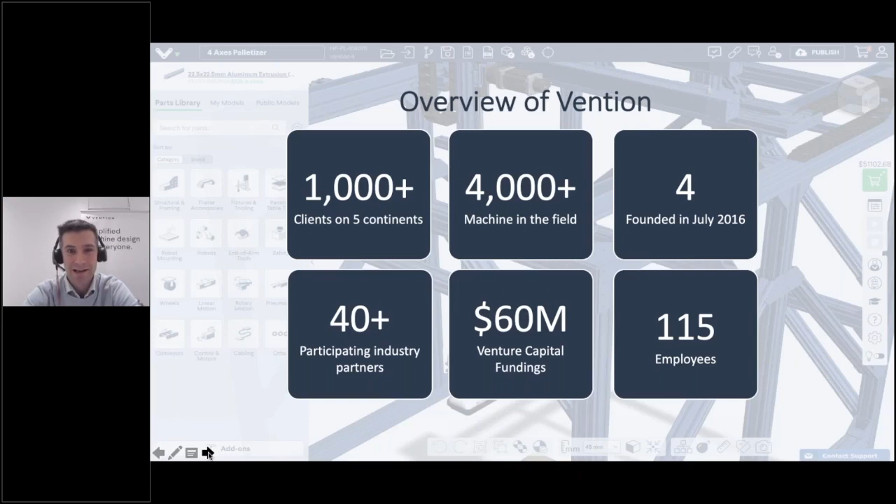Now, I'll start today's discussion by talking about what is changing in the world of industrial automation. All of you here today must have seen or experienced firsthand the world of industrial automation as we know it. We've seen car factories and consumer electronics factories being fully automated for several decades now, and that's a true reality. But if you look at the broader range of manufacturers out there, there is a significant amount that today cannot automate.

The reason for that is fairly simple: the price point of acquiring and deploying more traditional industrial automation technology is such that unless you're a high throughput factory, it's really hard to generate an interesting payback. The higher mix you are, the shorter the payback period you will expect. Most of the clients we work with would like to achieve below a 1 year payback.

By running hundreds and hundreds of business cases and ROI simulations with our clients, we tend to see this break point around 20,000 units a year, where below that, with traditional industrial automation technology, it's really hard to achieve that given payback for higher mix manufacturers.

There's a reason why industrial automation technologies are costly. First of all, the price point of the technology has been geared for high throughput production, but also just the sheer cost of integrating technologies from various manufacturers into a comprehensive system is quite manual and requires very expert professionals to support such tasks.

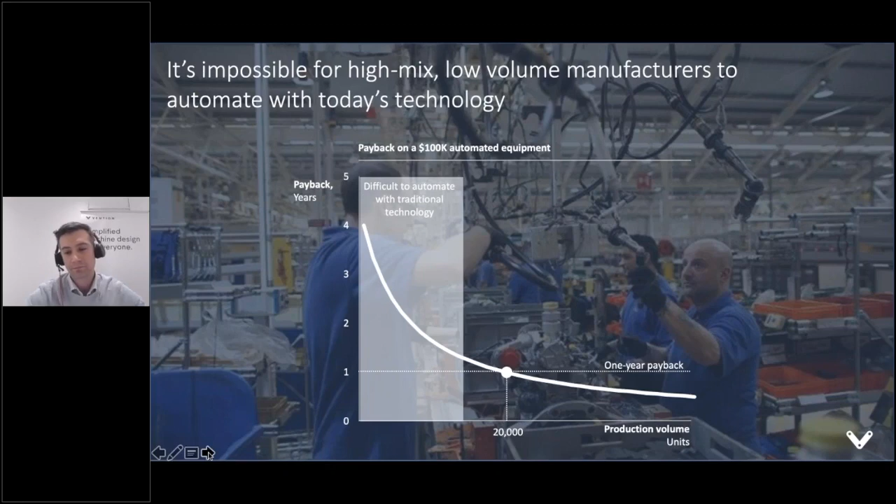Interestingly, I started my career in the world of machine design. I was a very young engineer sitting behind a CATIA station back in the early 2000s, and this is the process that I used to go through several times a year as I was supporting machine design for some of my clients back then. We were starting most projects, once the spec was fully established, by going on various industrial distributor websites to find all the components and technology we might need.

And all those components, even though of extremely high quality and very well suited, were all operating across different standards.

So you were finding those components, finding the 3D model, bringing that into your 3D CAD software, and realizing that a lot of those components use different standards, whether connectivity, protocol communication, or just mechanical standards. So you realize you have to design several custom parts to unite those components as one. And from those custom parts, you have to issue 2D drawings, generate a bill of materials that you can eventually give to procurement to start sourcing the hundreds of components that a custom automated equipment might require. It's only after all the vendors are found, typically folks that meet both quality and cost.

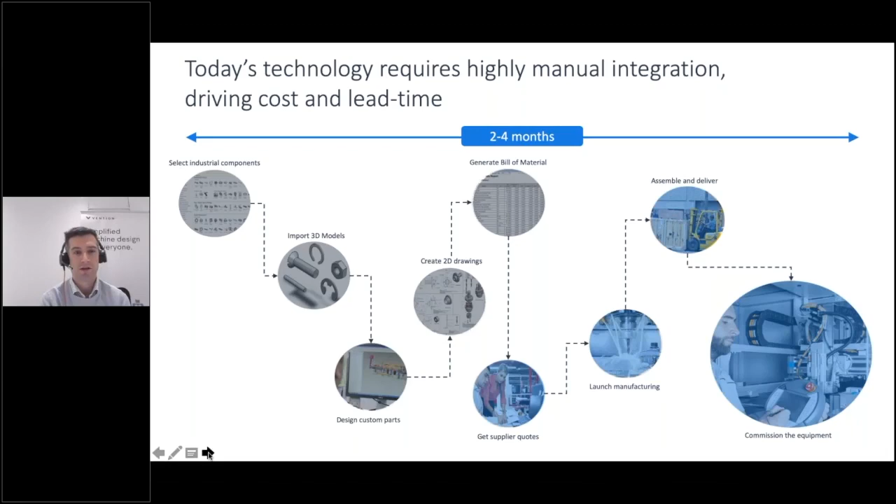So what happened for us around 2014 is we realized there's a humongous cost saving and time saving opportunity by removing those interfaces. But if we were able to provide a digital environment where users can select, design, automate, purchase, and deploy their equipment in the comfort of a web browser, you would save a lot of time and therefore money. And as a result, drive down significantly the cost required to deploy industrial automation, expanding the market from where it is today.

Those are some of the initial trends that we had seen in the early days of Vention, but there's a couple I want to point out because those trends are not going away, and I would even imagine that the world we're in with the pandemic would actually accelerate some of those trends that were there back in 2016.

One thing for certain, when I was back in the early 2000s designing custom industrial equipment for automotive and electronic clients, the platform of those products used to last between, a car could last for probably 7 years. Today it's now 3.5. Consumer electronic products could last for 2.5, 3 years. Today we see some of our clients operating on a 12-month basis for their consumer electronics products.

So when the time window you have to design and deploy equipment is getting shorter, the amount that you can spend up front is also getting much shorter because you then have less time to depreciate that equipment. Out of a 12-month life product, if we can deploy the manufacturing system in 2 weeks instead of 3 months, we just gave the client back 25% of his product revenue payback, and that's substantial.

To me, this shift in shorter product lifecycle really is opening a new era for industrial automation where the technology has to be right-sized to the product lifecycle. That's one of those trends that isn't going away.

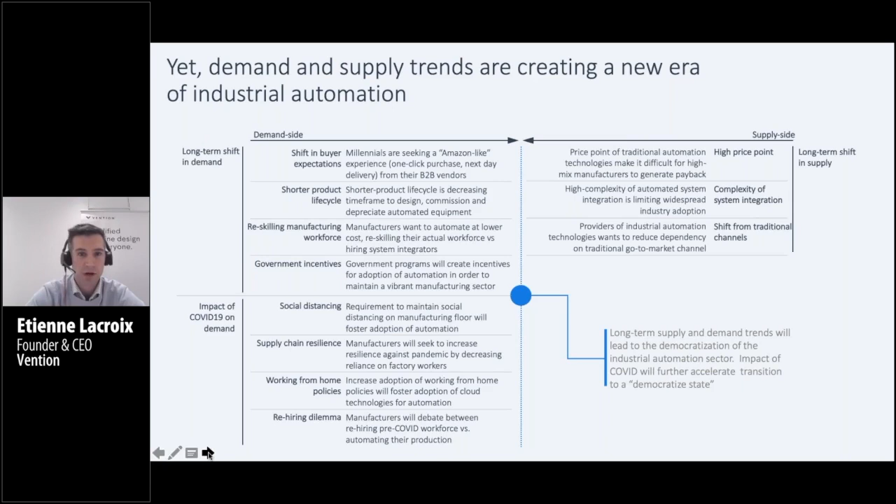Some of the factories that right-sized their workforce during the pandemic will face the dilemma of either rehiring their workforce to pre-pandemic levels or automating some of their previous operations. We tend to see that the decision taken by those companies is a mix or hybrid approach. Obviously, workforce will be rehired, but also more processes will be automated. We expect this to drive greater adoption of industrial automation in the coming years.

Now, what we also see on the supply side is how the market is getting democratized. We see hardware technology providers, folks that manufacture cobots, vision systems, end-of-arm tooling, that today depend on a much more complex go-to-market model with several handshakes required between integrators, distributors, and end users, wanting to have a much more direct approach to end users. The need to deploy their product in a simplistic fashion, where the end user can directly understand and deploy them, is leading to a lot of technologies that democratize our industry.

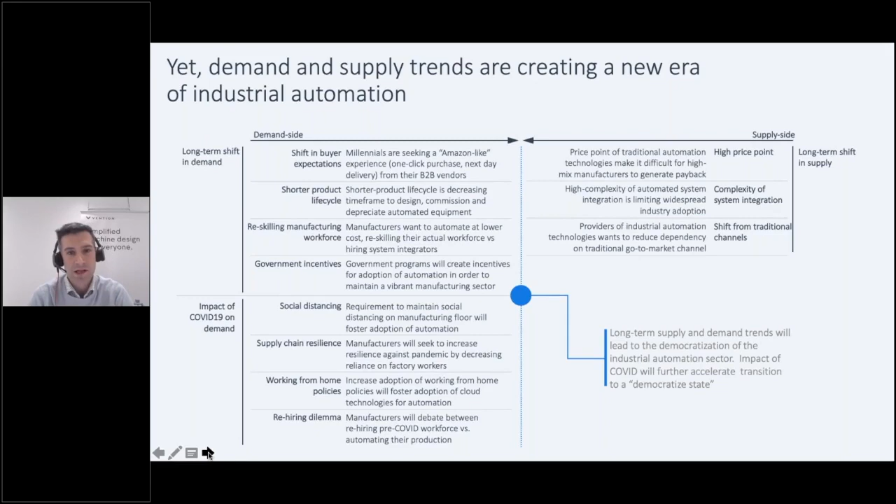A lot of those trends, and there's more I could have covered, are not going away. They're reshaping the demand, reshaping who's the final customer, and reshaping what type of factory is now embarking on industrial automation projects. For us, this change in user, we call that almost a new era for industrial automation. For us, it was the calling for a new category of software.

We call it MAP, or Manufacturing Automation Platform. It's a category of software. Vention is one of them. I think there are others emerging as we speak, but it's a category of software whose primary mission is to empower a manufacturing professional to self-deploy industrial automation technology.

In the world of automation, the beautiful thing is there's now enough modular components that the need to design custom parts is significantly reduced. Once this is true, you can imagine a platform whose primary goal is to make sure that the system being designed or assembled out of those modular parts, those Lego parts, will function through the software itself. Interestingly, you can now envision a world where a lot of those tasks of validating system functionality can be done by software and a curated component list, as opposed to being done by specialized engineers in controls and so on.

And with that, you obviously significantly reduce the barriers for adoption. So for us, this new category of software is called MAP, Manufacturing Automation Platform. It brings aspects of 3D CAD software, PLC programming, PLM software, and definition requirement management software, and it brings them into a single digital environment united from beginning to end.

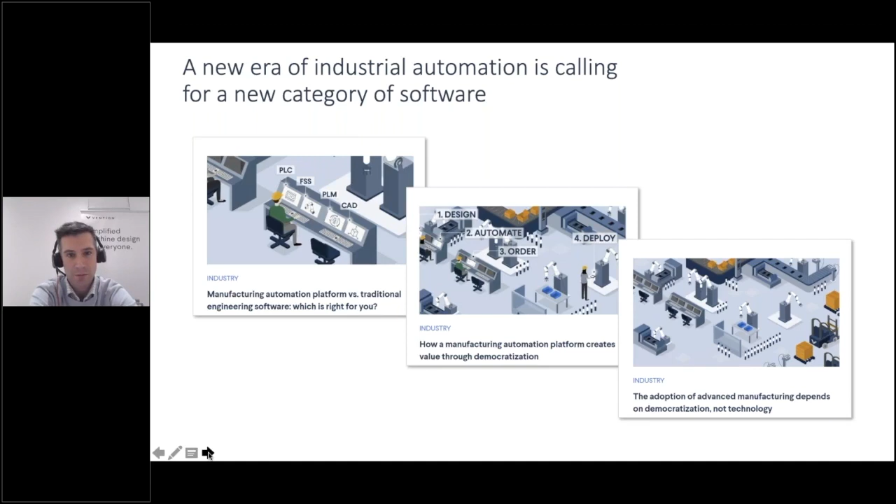Simplicity is significantly augmented by the fact that all the components available within the MAP are compatible with one another. So if a system is designed with those components, the end user knows from the get-go that the system will work. The MAP for us was the missing layer.

We see this as the beginning of the plug-and-play automation era, and I think companies like Universal Robots and ATS have demonstrated that you can already modularize a lot of the building blocks to deploy industrial automation. There's also this need for reskilling and upskilling the workforce, and providing them an environment where they can become successful at designing and creating those systems.

So again, the workforce that used to operate the factory today becomes one that now designs the factory of the future. But to enable all those modular components and this new workforce to design the factory to come together, we were missing that software, that manufacturing automation layer, that MAP, where it brings it all together in the same environment. So for us, MAP has four phases.

A design phase that is mostly, entirely online, where users can work out of modular parts coming from all sorts of partners that specialize in robot arms, end-of-arm tooling, conveyance technology, and vision systems, and they're integrated in a way that if they're available, they're compatible with one another. So they are integrated in a very curated fashion, and end users can design because a lot of the 3D design software simplifies the design experience.

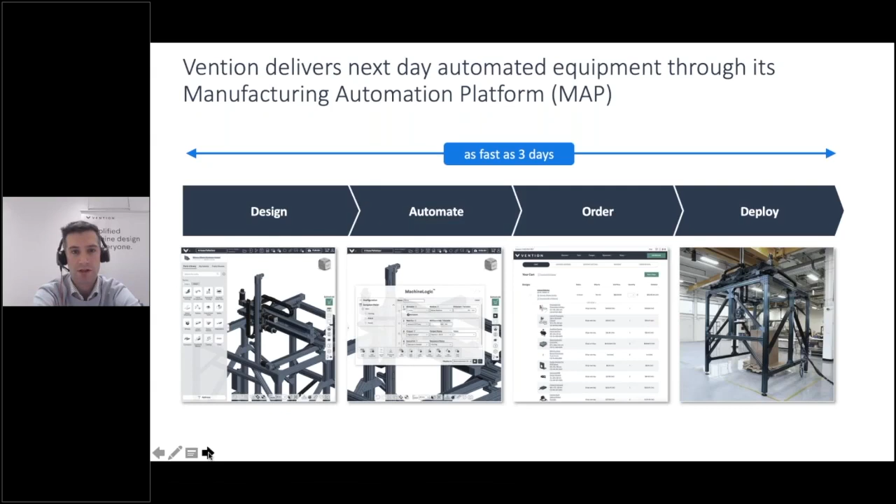To show you that all in action, I'll ask Anna to display a little short video that will last roughly 30 seconds.

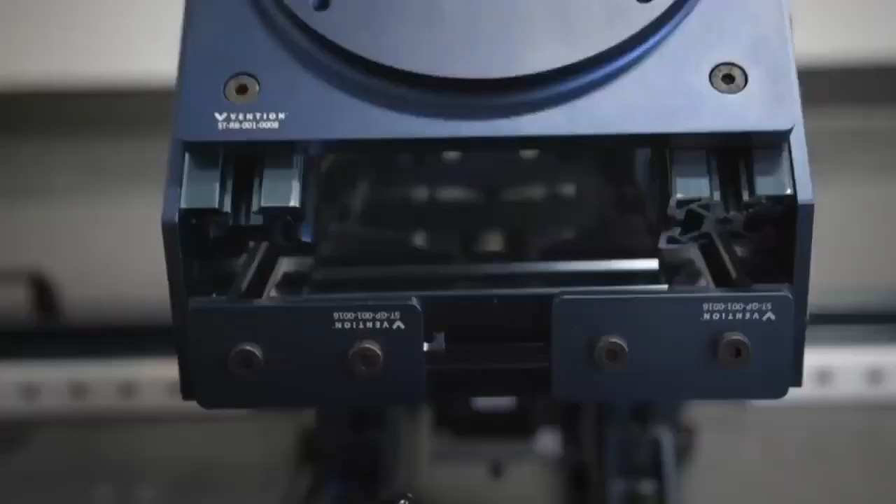Build custom industrial machines in days. Design your machine in the simplest online CAD. Get inspired by our public designs, or build your own in minutes. Program and simulate your machine directly in your browser.

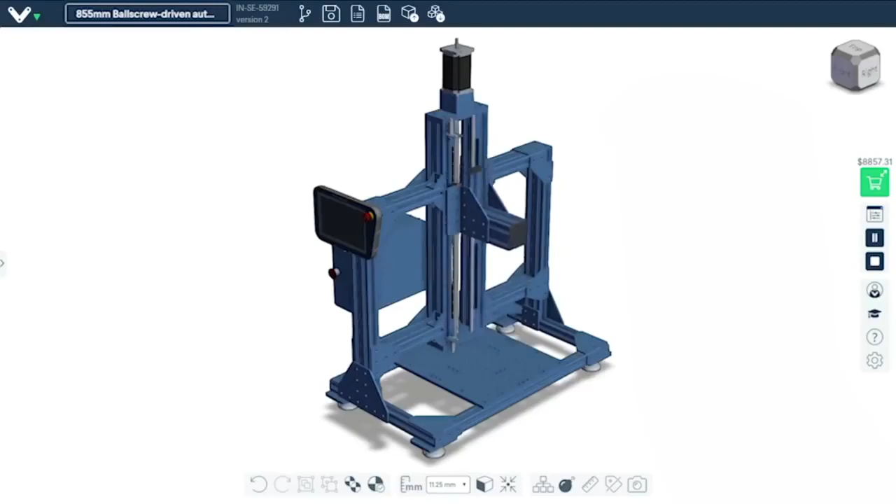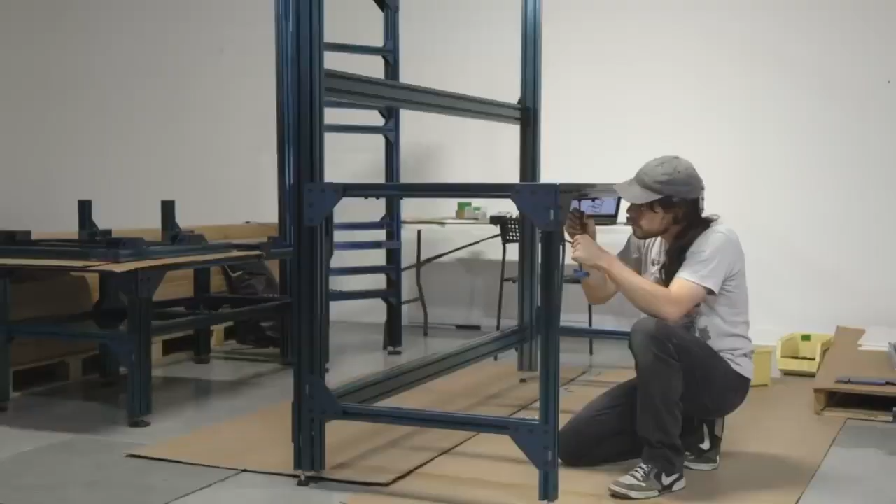Build a broad range of automated equipment, no matter the complexity. Upon completing your design, review your bill of materials, select shipping options, and order. Receive your part kit within days. Assemble your machine using a single tool from beginning to end. Simple, quick, and efficient. Design your machine today. Receive it tomorrow.

That gives you a sense of what is possible today with today's technology in terms of simplifying the act of designing automated equipment. I'm just trying to change a slide as we speak. There we go.

If we put those time savings together, to go from the traditional two-month process and bring that down to a few days, we had a chance to work with clients that compared the cost of their more traditional approach with the cost of an integrated approach for their specific project.

And what we typically see is that a lot of the cost savings materialize as part of the engineering work. Less time designing 3D equipment - this is typically reduced from weeks to just a couple of hours. Obviously, no need to create 2D drawings when you work out of modular parts only. No need to pay for a CAD license. Significantly faster procurement cycle, as information doesn't need to be converted from one system to the next. Everybody has access to the online design and can proceed with purchasing, given their proper rights. Significant time reduced as well in validating component compatibility and figuring out how to integrate them during the deployment cycle.

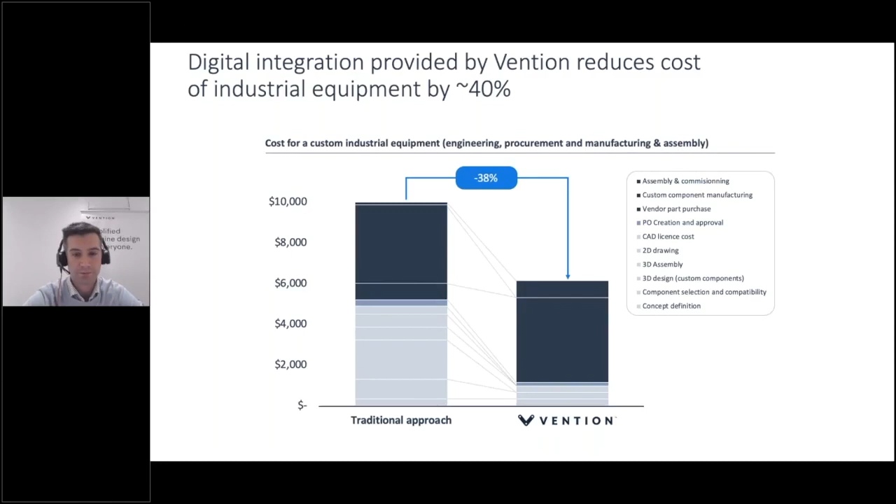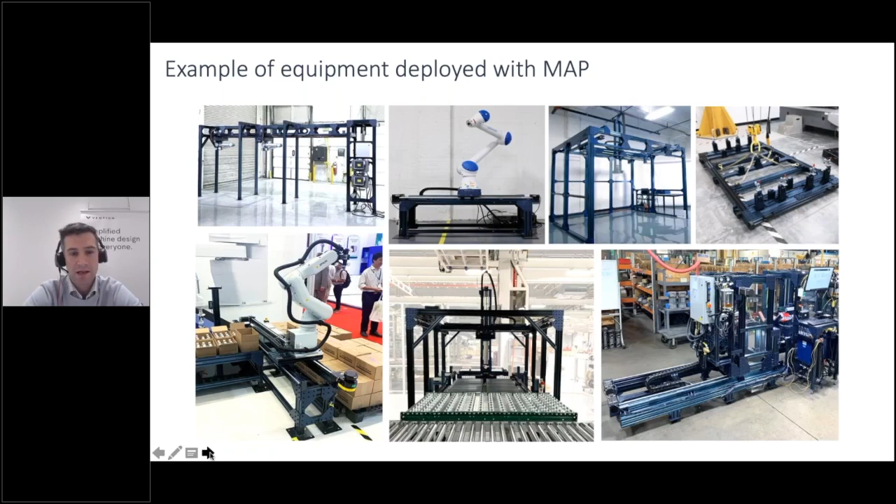So the range of complexity varies greatly, from more simplistic automated equipment to more complex automated equipment. But again, they've all been through a very similar process, where the starting point was an online design, followed by an online purchase and self-commissioning afterward.

So now I'm going to go over some of the technology building blocks behind MAP in the next 5 minutes. So if I go back to this MAP workflow - design, automate, order, and deploy - I think there are several components of technology that are required to make this workflow work as one and provide the time savings we've defined.

One of them for us is the ability to define requirements online. Very often with this new class of user that is just beginning their learning and understanding of the industrial automation world, we need to give them tools so they can express what they need in a way that will lead to success. We'll call that machine scope in our case - it's basically a requirement definition where folks can define their current process, define the new process, scope how they're going to validate that the new machine will work, and obviously define their holistic set of requirements.

3D design online that is very simplistic, for us we call that machine builder. If I move to the automate phase, MachineLogic is a code-free way to program and simulate automated equipment. Machine motion is a control technology, and Simon touched a little bit on the control cabinet. Machine motion is a way for us to prevent users from having to create a custom control cabinet, but instead use a box that is already equipped with all the requirements, the safety system, the drive, power supply, control infrastructure, and can be rapidly deployed without having to create a custom cabinet.

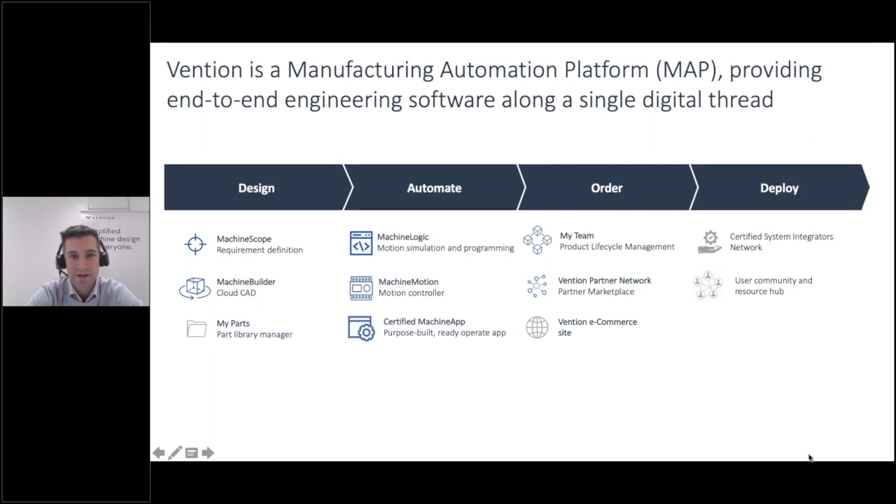My Team is the portal where teams can collaborate. One thing that every company and every user has in common is a web browser, and My Team is a way to bring everybody together.

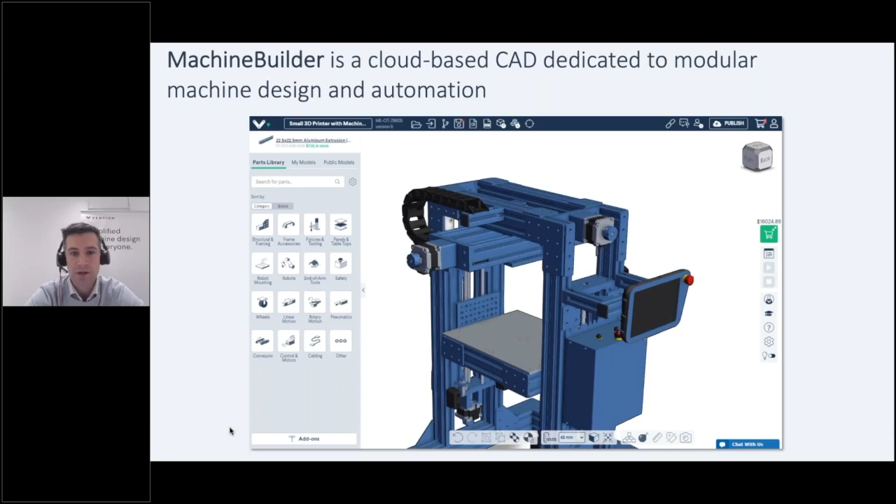This is an example of machine builder. On the left side, you see this modular part library that users can pick and choose from. All those parts are compatible with one another. On the top right, you actually see price in real time as components are added or removed. You can even see the commissioning time you'll need to assemble that machine based on the parts selected.

In terms of simplifying 3D design, which is really the starting point of every single automated equipment, the ability to work with modular parts, or those Lego parts, enables us to do design automation tasks that would not be possible in a traditional CAD. So I'm just going to point to a few of them.

One of them is what we call the configurator, or component configuration engine. If somebody picks a linear actuator, the tool will drive the user through a step-by-step guide to configure that component properly. Similarly, a part kit assistant is a feature where, if you want to use a light curtain for example, which comes in pairs, there's a left side and a right side, it will guide the users through selecting all the proper components that are individual parts of a given kit.

Design checker, this is one of my personal favorites. Design checker is a procedural engine to make sure that the design will work in reality, that all the laws of physics will be respected. To some extent, design checker is a spell check for machine design. As we build more and more automation, that type of technology becomes more and more sophisticated.

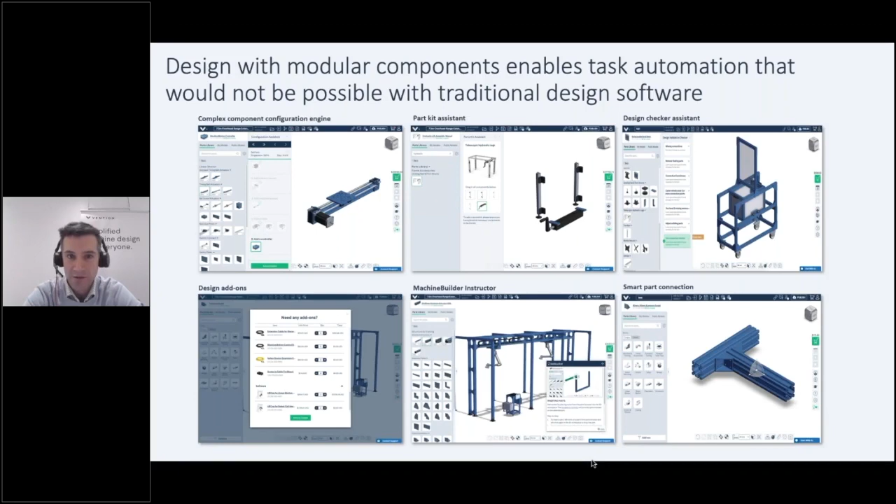There's also an instructor feature in the middle bottom, which is an interesting one, where users can learn how to design industrial automation equipment with a step-by-step guide as they actually design their intended equipment, which makes the act of learning very easy and accessible to a broad class of users.

Machine logic, again, is this code-free environment that replaces the more traditional PLC programming interface, where users can still create fairly complex programs with loops, variables, and conditional logic, and create applications that are hardware agnostic—whether it's a timing belt or a ball screw actuator, the software remains valid and agnostic of the hardware choice being taken.

That software takes the user from the cloud to the shop floor in just a few clicks. Once the equipment is deployed, it's the actual same user interface that can be retrieved to operate the machine on the floor.

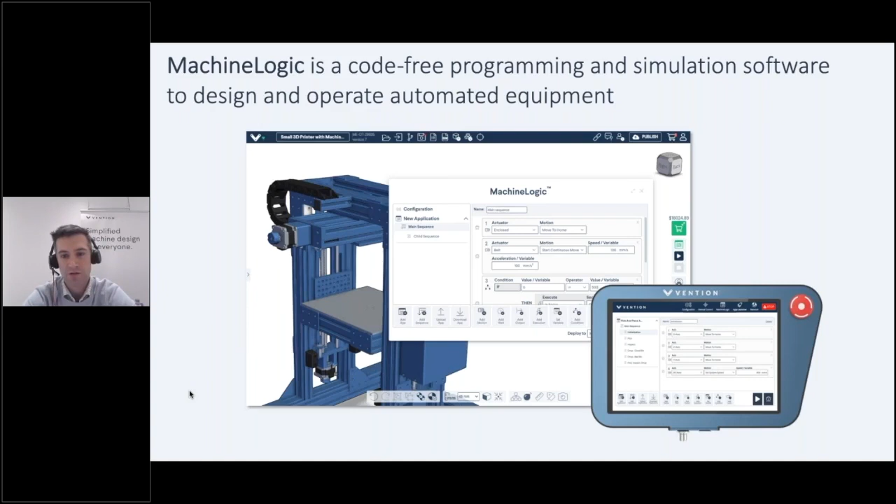For us, at the heart of such simplified industrial automation infrastructure is something we call machine motion. Machine motion is a cabinet-free way to deploy industrial equipment. It's a motion controller that includes drive, safety system, and power supply, and it can connect in a really plug-and-play fashion with a variety of actuators, whether it's roller conveyor, belt conveyor, electric cylinders, pneumatic cylinders, rotary actuators, enclosed rack and pinion, or ball screws. All of those devices become agnostic of, and plug and play with, the controller.

And again, it enables anybody that can connect a wire to then deploy linear actuators in a very easy and straightforward fashion. I like to say that this is the equivalent of plugging a mouse and keyboard into a desktop computer, but now applied to industrial automation, while keeping that single wire philosophy.

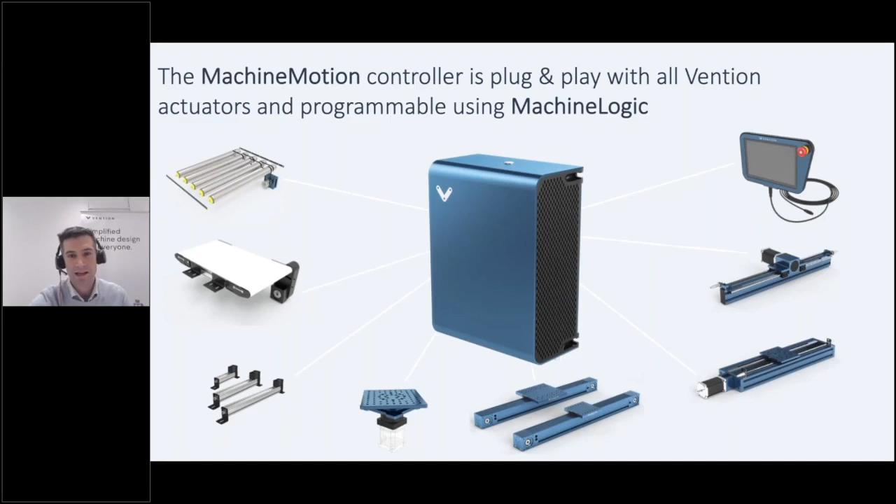I'll touch on just a few remaining items before we open it up to questions. With the modularization of the hardware components also comes the modularization of the apps that can be used.

Here we show two examples of what we call machine apps: one for palletizing, one for path following. In both cases, those purpose-built apps are off-the-shelf available with customizable user interface, entirely hardware agnostic. So whether the palletizer is a 2-pallet or 3-pallet palletizer with separators or no separators, one in-feed conveyor or two in-feed conveyors, it's the same software that can configure each pallet pattern in just a few minutes. The same logic applies to any path following application.

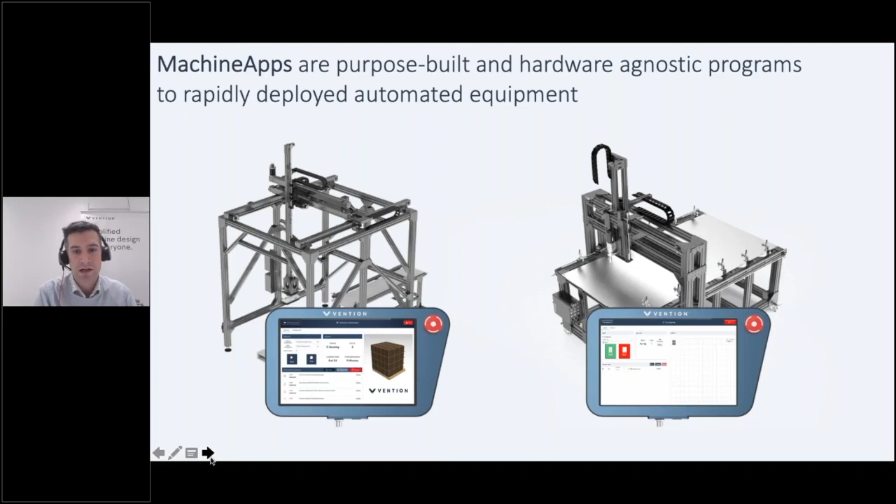Whether it's glue deposition, routing, or pattern drilling, these are pre-built apps that prevent users from having to create purpose-built or custom code specific to their equipment. One thing that becomes obvious, and a trend we'll see with several vendors in the industry, is this applicationalization of use cases. More and more use cases are being productized, which makes deploying them much easier. This is just a few that Vention supports, but this trend is here to stay because it simplifies the barriers to adoption of industrial automation.

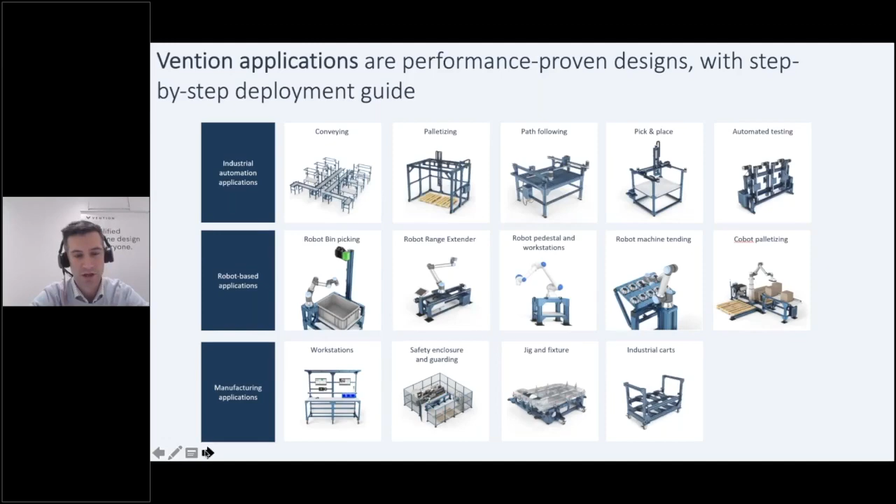Now, I've talked before about partners coming together to serve that new market of more democratized industrial automation. For us, it was obvious that we needed to make space for them to participate. So in the Vention platform today, you have the choice to work with folks like Universal Robots, Doosan, ATS, SMC, Dorner Conveyor, and a lot of other players that want to tap into that more do-it-yourself, self-serve expanding market for industrial automation.

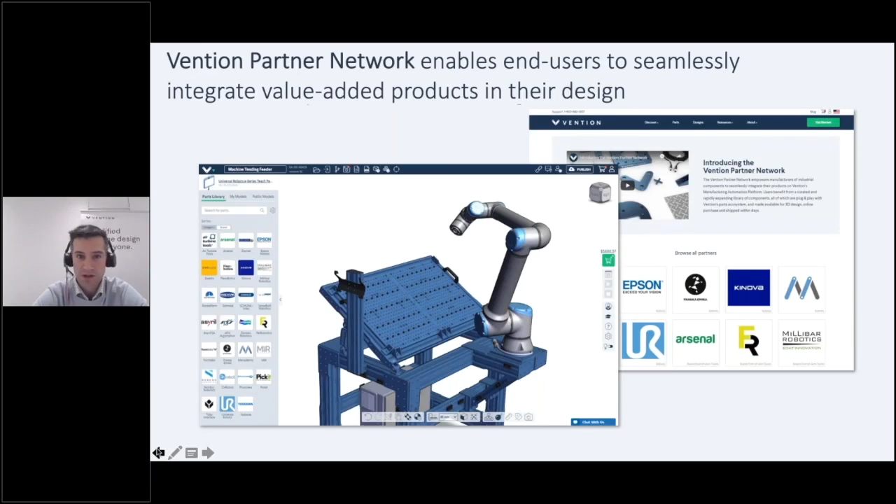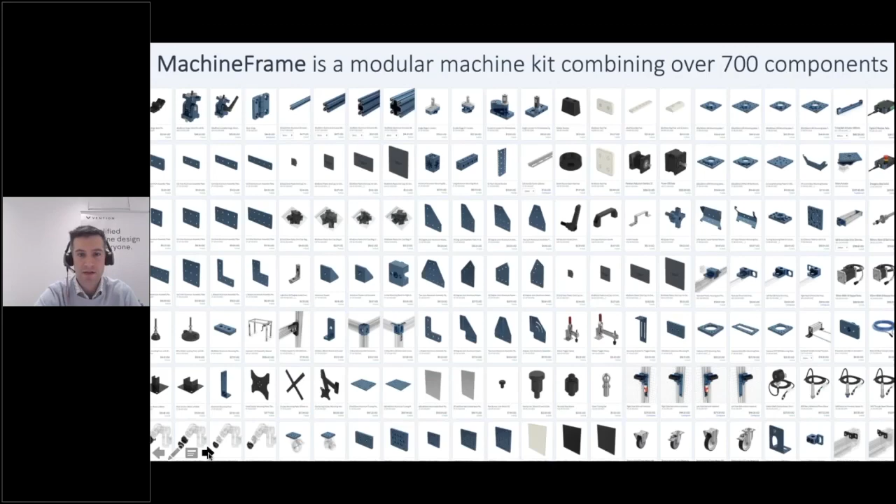This is one of the purposes of MAP, to make sure those partners can participate. And obviously some of the components show this Legofication of components available within MAP. There are hundreds more we could have shown on this page, but the intent is to create standardized components that are compatible with one another and fully embedded into the design software as well.

Last, I'll touch on the final piece of technology, my team's web-based portal that every team can access to follow their project and deploy them. That's what I had for today to talk about MAP, and I'll be happy to give the microphone back to Mike for some questions. I hope it helped you understand a little bit how the market for industrial automation is expanding to serve a new class of user seeking a more democratized experience.

Great, thank you, Etienne. There's a lot going on there.

Even beyond the democratization, there are a number of trends or ideas underlying that have far-reaching implications for the machine design community or the automation industry. A couple of things that jump out to me: the idea of abstracting out or removing a lot of the complexity from what has traditionally been. Just like you said in your opening remarks about having to source ten different products, or spend a lot of time just picking one actuator to make sure it fits with all the other components, and being able to do the Legofication of components, so one just plugs one thing into another, and they can think more at the subsystem level rather than the individual widget level.